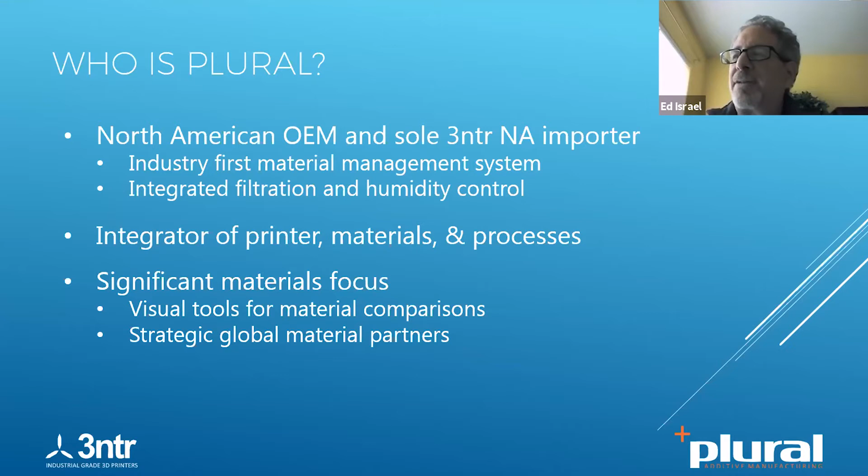Probably more than anything else at our company, even though we represent printers, we have a strong material science program, where materials are really the primary reason for people developing applications. The printers are just the vessel. We have relationships with global material companies, and we've developed some very cool visual tools because we got tired of people asking us how this material compares to another. Now you can look at it visually for the top 5 or 6 properties of the materials.

This is the Spectral itself. It's a fully integrated system, everything built into it. What you see is the entire printer. If you were to rotate it 360 degrees, you'd see basically just flat panels all the way around, other than a power cord going out the back side.

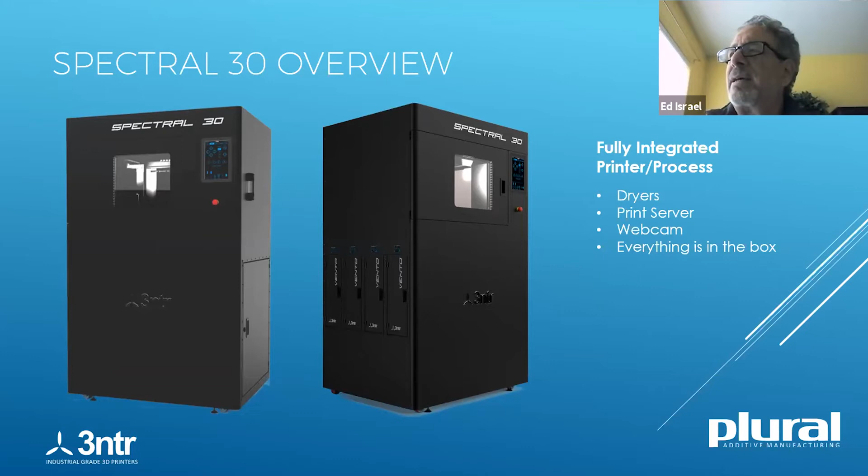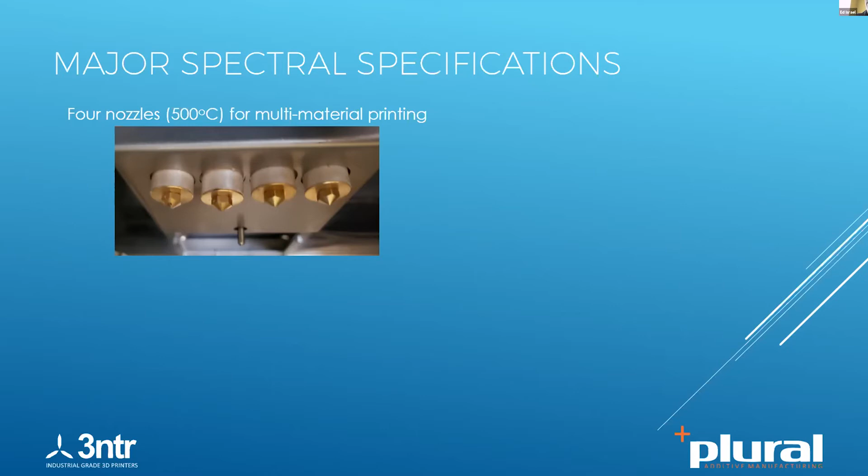Let me run into some of the major specifications of the printer. It's got 4 retractable nozzles that run at 500 C, and the opportunity here - I'll show you in a later slide - is literally to be able to run not only backup materials or backup extruders, but also run PEEK and ULTEM, or PEKK and ULTEM, 2 different jobs at the same time in the same build, running 4 nozzles and 4 materials. We'll talk about those materials.

The system comes with, and this is another unique aspect, 4 smart independent dryers. They automatically take this very expensive material up to its drying temperature once loaded, and then drop it down to its dew point and keep it dry, so you can be assured moisture is not an issue when printing with these very expensive materials.

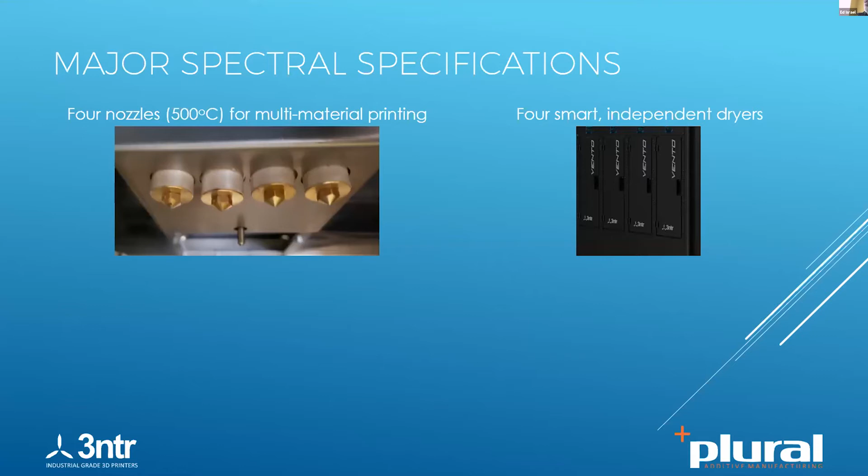We have a very unique print bed made out of solid carbon fiber and PEI. It slides in and out on magnets, so it's automatically level. Print bed will last for thousands and thousands of parts. There's absolutely no glues or films or anything needed with it. And again, it'll run to 300 C.

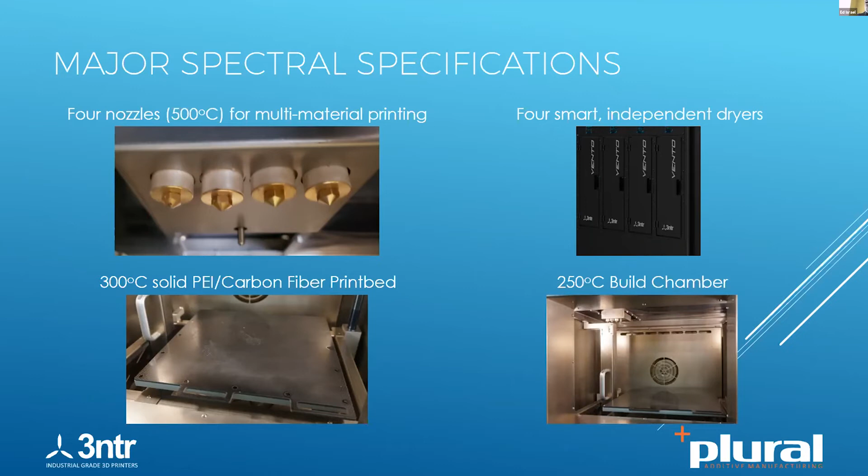The printer is really future-proofed in that there are only 1 or 2 materials out there in the market that can actually work in environments that are hot, and the build chamber itself is 250 C. That opens the door for new materials from Arkema, like their PEKK semicrystalline, which can handle very challenging environments - like 2-3 miles down under the ocean, handling the pressure in an oil and gas environment.

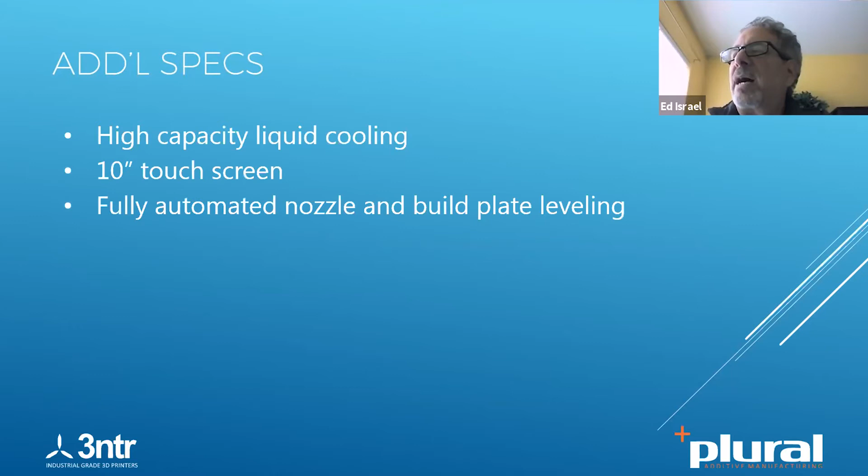Some of the additional specs I'll run through very quickly - generally I have a slide for each of these. The liquid cooling gives you even flow, keeps your nozzles at an exact temperature, as flowing plastic is very finicky. 10-inch touch screen, fully automated nozzle and build plate leveling.

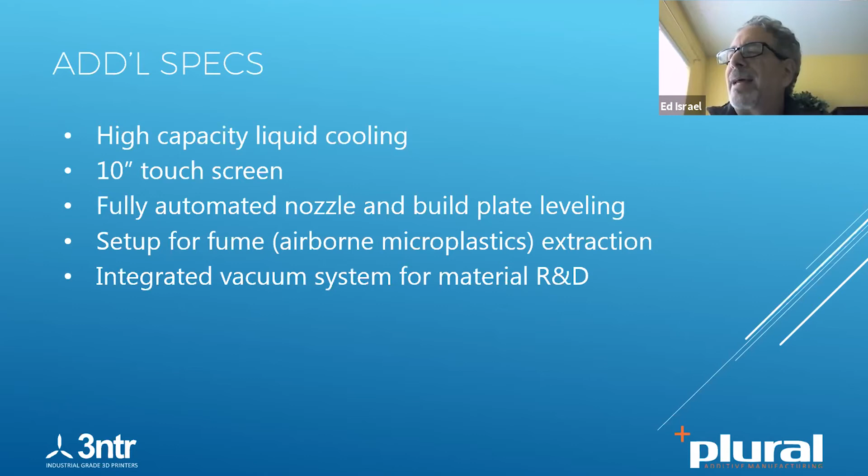Back to the need for fume extraction for both VOC and particulates. And we have an integrated vacuum system for material R&D - there's a switch on the back. Generally speaking, you wouldn't need to run a vacuum system at all, but if you wanted to try materials that might require additional holding power, you could use it. I don't know that it's necessary for many parts.

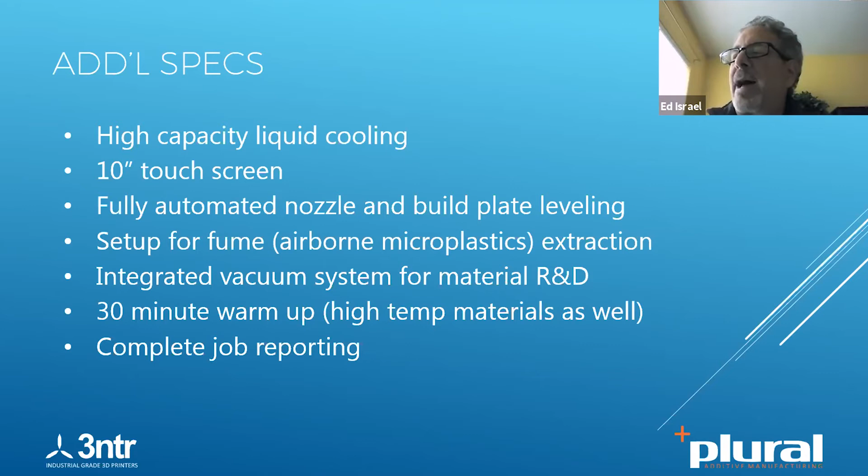Another huge thing is the 30-minute warm-up time, as opposed to hours and hours from some other leading vendors to get ready to print high temp materials. Complete job reporting, kind of an industry 4.0 model - it will track all the parameters, how hot the part was at a particular point in time, all parameters related to the build, and you'll be able to push that out into whatever format you want. And when that door is closed, you almost cannot feel the heat and almost no sound coming out of the printer.

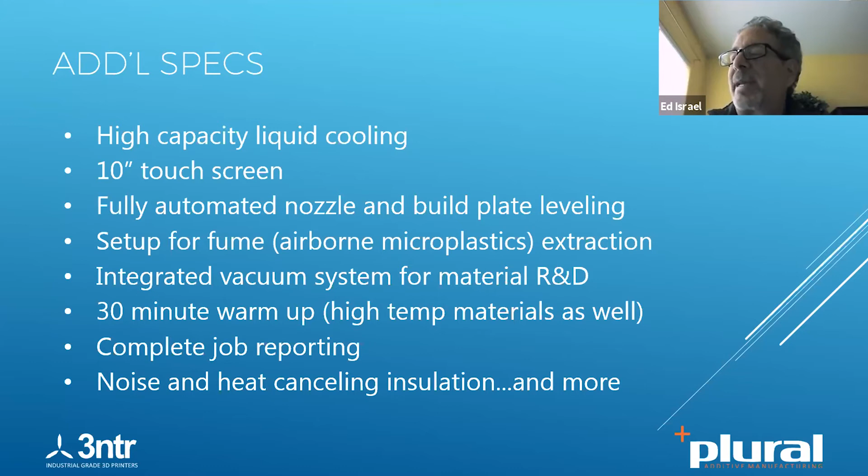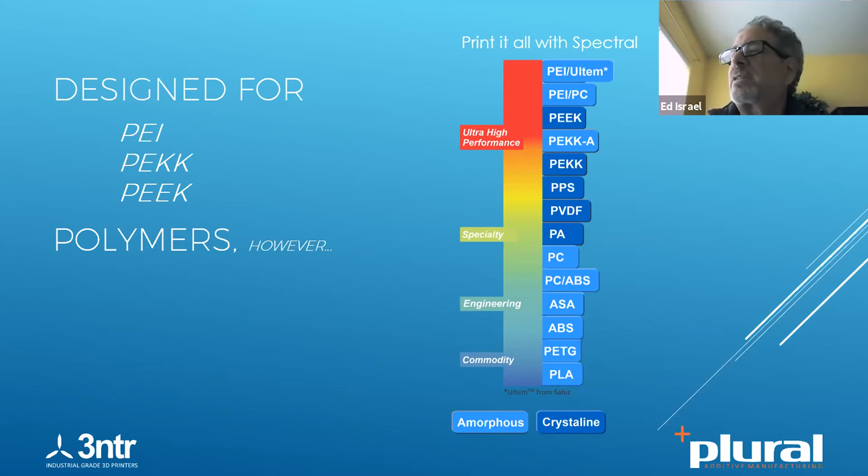Give you an idea of some special parts. Every engineer has their shiny unicorn drawer, but let me give you an idea of some of the PEEK parts we've printed out of the printer. Natural and black Ultem we're printing.

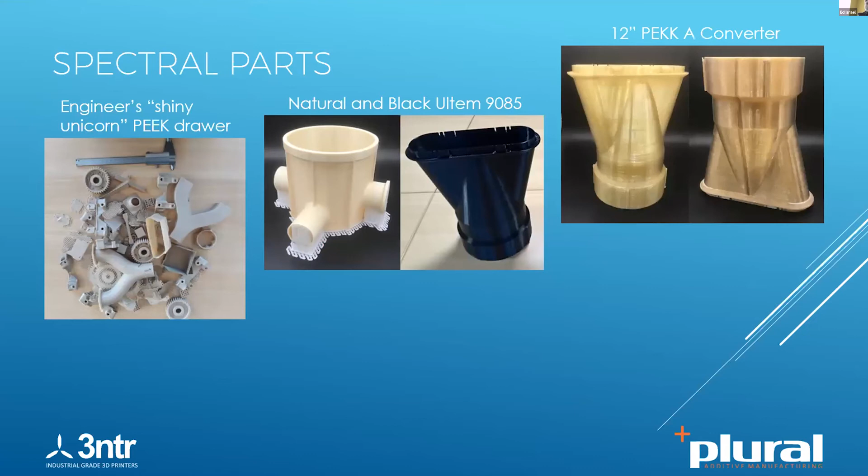This is a 12-inch PEEK using PEKK A. That's basically a converter.

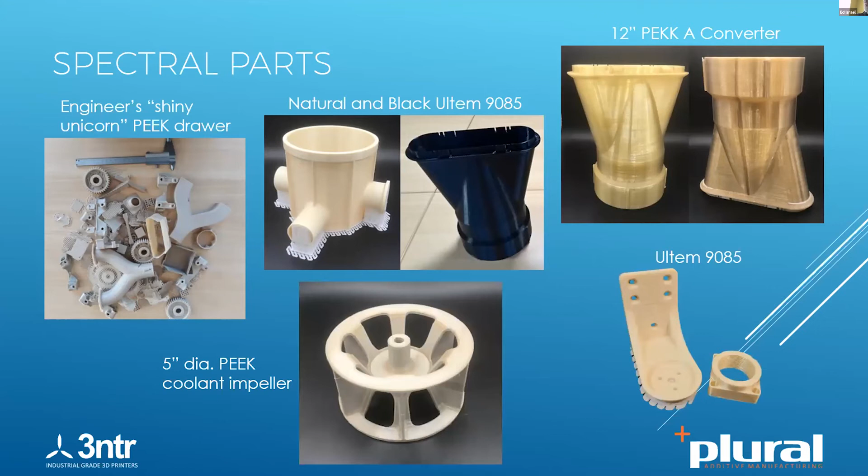And here's a PEEK part at 5-inch diameter, a coolant impeller. And then this was a bracket that we printed for a company that flies about 80 to 100-pound drones to replace metal parts. We've also found a 35% filled nylon that works well too to replace the metal brackets.

I moved through this fairly quickly, which I think was the plan. You can join us on our virtual booth and talk with Matt.

You can watch a video, our first effort at videoing with social distancing on the printer, and then we have a teaser video there as well. If you want to learn anything more about this particular printer, we have the first one in North America in our offices, and actually the only one in the world that's assembled right now, because at the factory in Oleggio, Italy, there are 12 of them that are 80% built, but then COVID hit. So we have the only running Spectral in the world right now, which is kind of exciting.

Or you can reach out to me at any time you like to talk more about the Spectral. Sarah, at this point I'm done with the presentation. Moved through it fairly quickly. I hope people were able to grasp from the speed, and I'm happy to answer any questions if there are any.